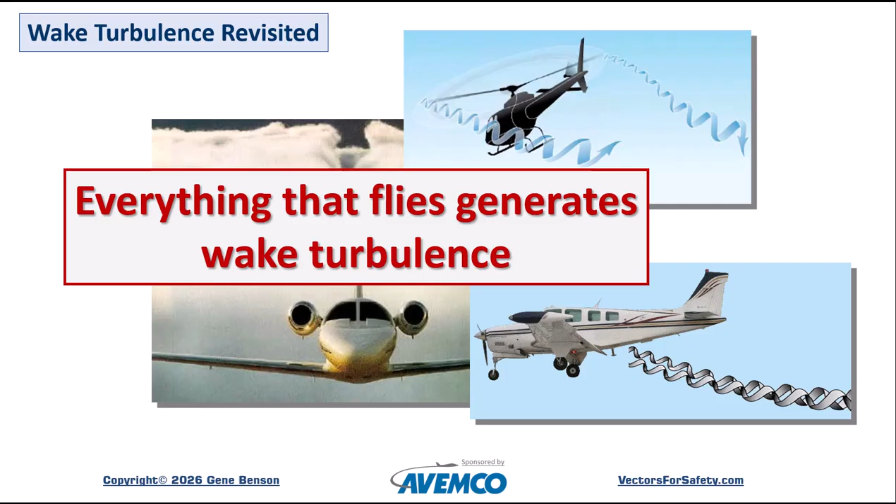Let's begin with a quick reminder that everything that flies creates wake turbulence of some sort. We must remember that helicopters can generate exceptionally strong wake turbulence, often called rotor wash. Along with that, we must realize that a helicopter can generate the same strength of wake as an airplane of a much greater weight.

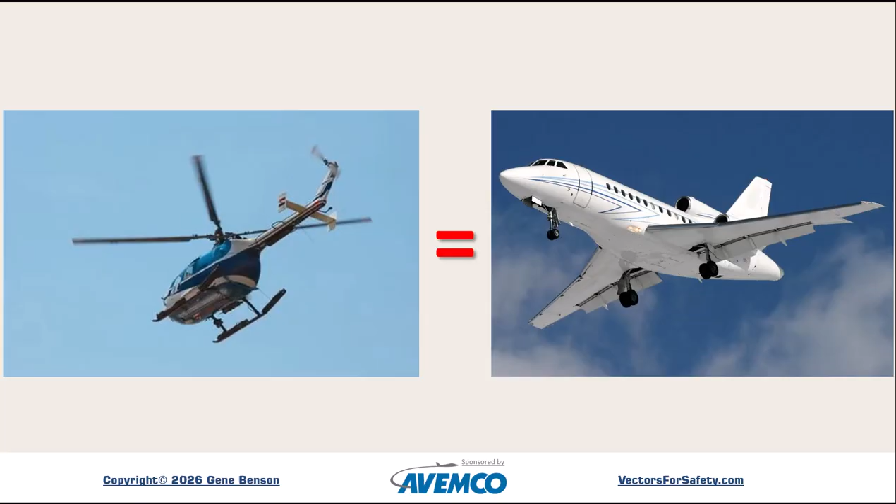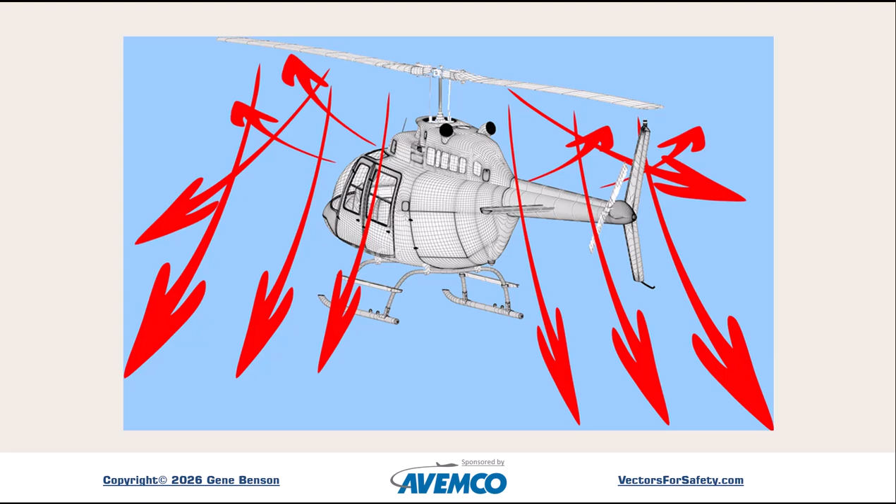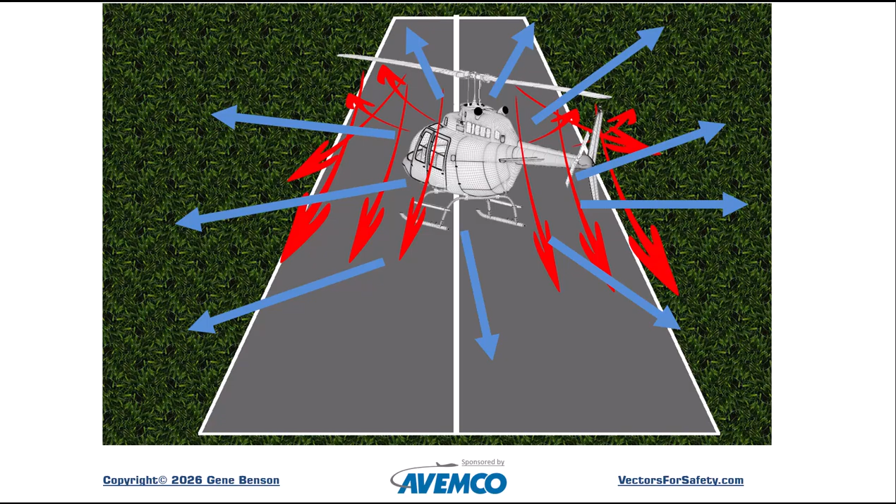In the case of an airplane, the vortices are caused by the high-pressure air slipping out from under the wings and looping around toward the low-pressure areas on the top of the wings. With a helicopter, similarly, the air loops from the high-pressure area under the rotor disc to the low-pressure area above the disc. But at low altitude, the downward rushing air strongly reacts with the ground contact and spreads out widely from beneath the helicopter.

And like with the wake generated from an airplane, the disturbances created by the helicopter will travel with the wind. Helicopters may hover taxi or follow a non-standard path. The strong wake, of course, moves with the helicopter.

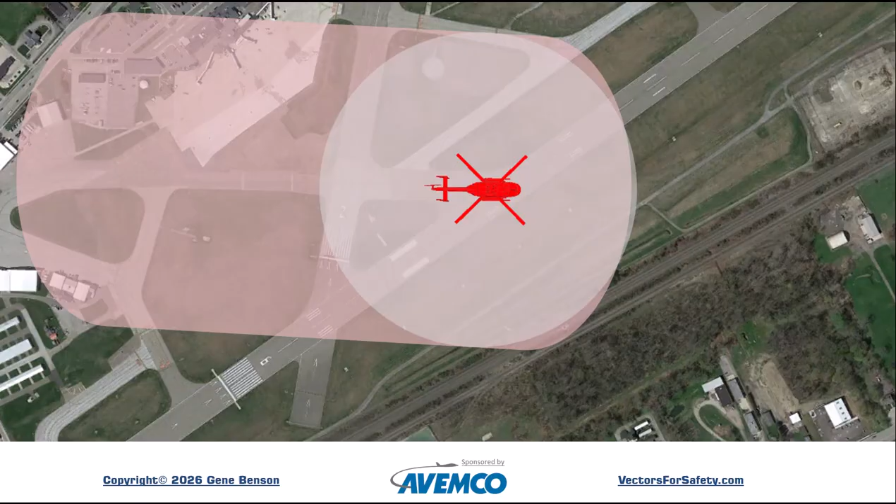Here's a disclaimer for the accident we're going to talk about, or any of the accidents in this series. Accidents discussed in this video are presented in the hope that pilots can learn from the misfortune of others and perhaps avoid an accident. It is easy to read an accident report and dismiss the cause as carelessness or as a dumb mistake. But let's remember that the accident pilot did not get up in the morning and say, 'Gee, I think I'll go have an accident today.'

Nearly all pilots believe that they are safe. Honest introspection frequently reveals that on some occasion we might have traveled down that same accident path.

This crash resulted in serious injuries to the 58-year-old private pilot and to the destruction of the Arion Lightning. It occurred in Pennsylvania in July 2022.

The NTSB report includes the following: 'The pilot of the light sport airplane reported that he was flying to an uncontrolled airport to attend an air show later that day. The destination airport traffic pattern was busy with several airplanes in the traffic pattern and a flight of 3 north of the airport. The pilot entered the traffic pattern by overflying the airport and crossing midfield onto a left downwind leg. At that point, a life flight helicopter reported 2.5 miles southwest.'

'The pilot subsequently heard a report from the helicopter again and asked him where he was. The helicopter stated that he was on the right base leg for runway 11 and number 2 to land. The pilot of the airplane announced turning to final for runway 11.'

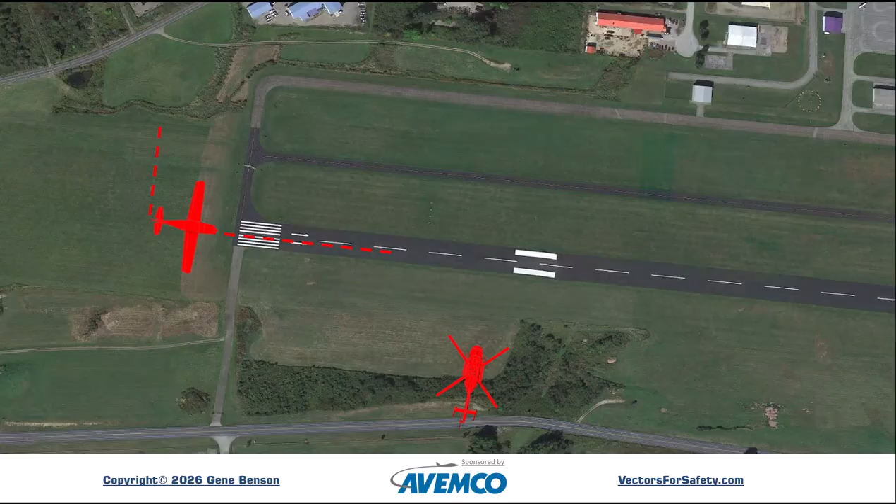'He was over the threshold at 20 feet above ground level when he saw the helicopter cross the runway several hundred feet ahead of him. The airplane then encountered the rotor wash, rolled right, inverted, and struck the runway, coming to rest on the runway.' End quote. We must note that the airplane never crossed the flight path of the helicopter.

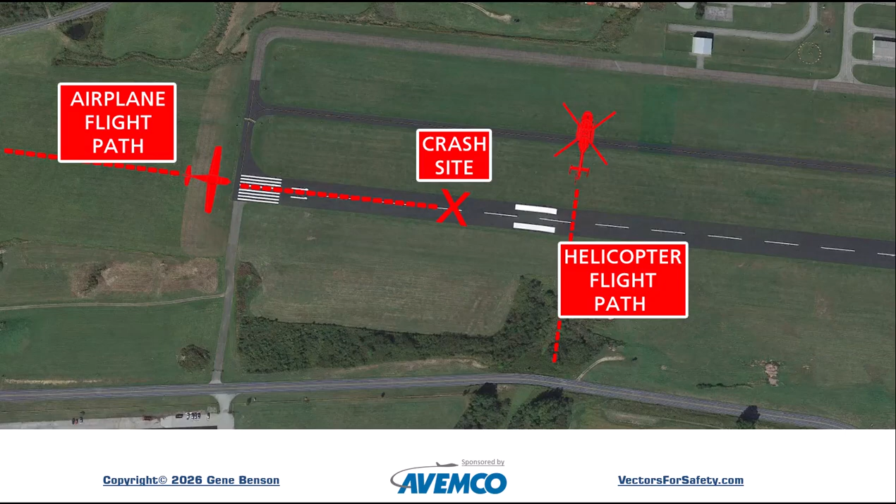The wake extended far enough out to upset the airplane some distance from the flight path. The NTSB probable cause states, 'The airplane pilot's inadvertent encounter with rotor wash/turbulence during short final approach, which resulted in a loss of control in flight.'

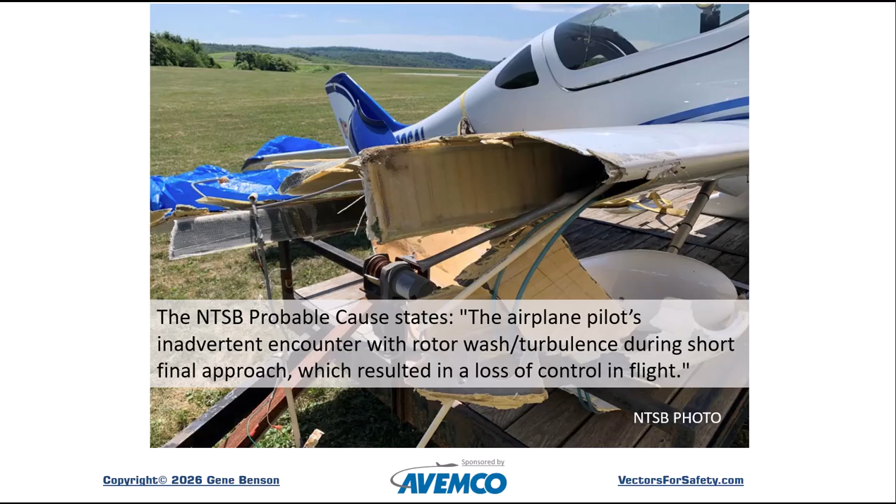So lessons that we might learn from this accident include: at any large gathering of aircraft, be alert for airplanes or helicopters flying non-standard or unexpected flight paths. Always be vigilant for the possibility of wake turbulence or rotor wash. And helicopters generate considerably stronger wake than do airplanes of the same size and weight.

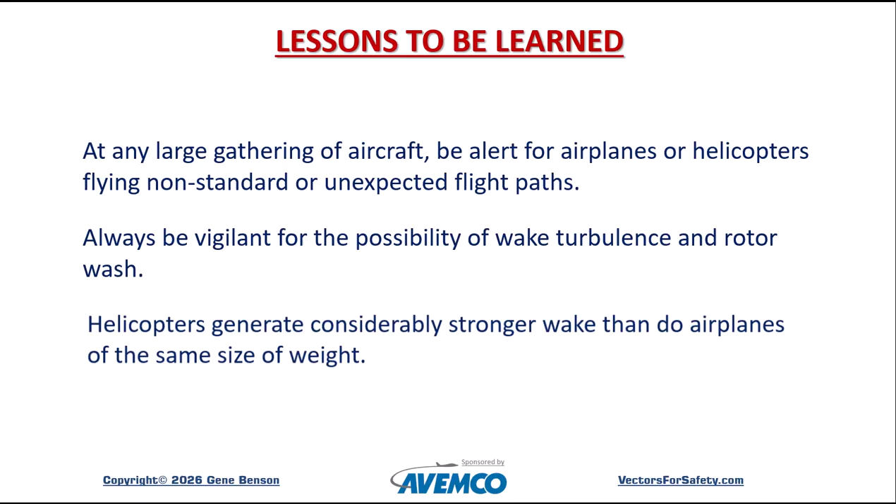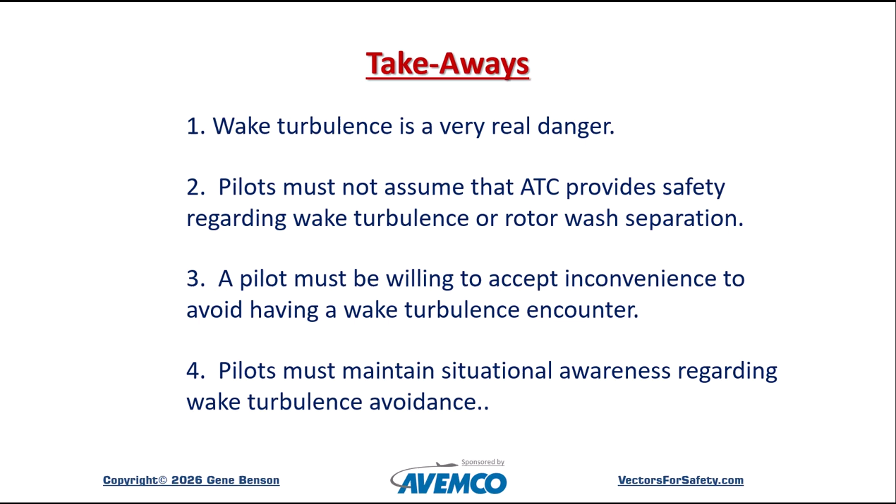And some takeaways: wake turbulence is a very real danger. Pilots must not assume that ATC provides safety regarding wake turbulence or rotor wash separation. A pilot must be willing to accept inconvenience to avoid having a wake turbulence encounter. Pilots must maintain situational awareness regarding wake turbulence avoidance.